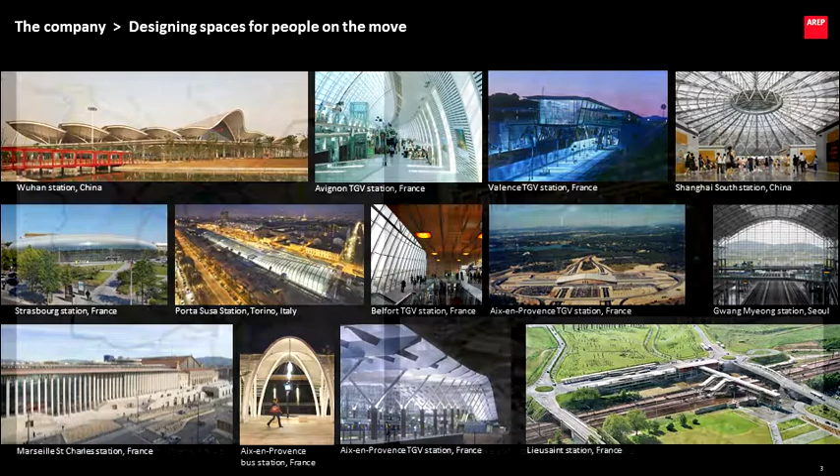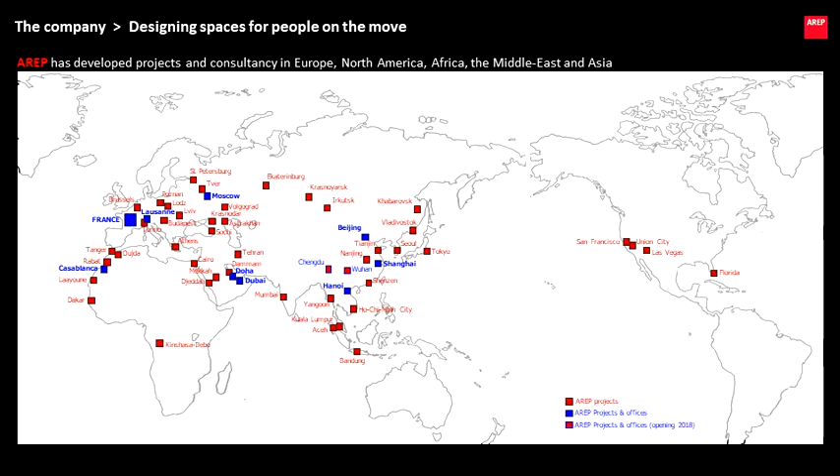We had the chance to start working when the kind of train renaissance was initiated through the TGV, which suddenly gave a new idea to transport, public transport, high-speed rail. And this high-speed record suddenly showed that train can be on another level. This was a kind of game changer for people, what train could be, at least in Europe. And it really changed the French and also the European geography.

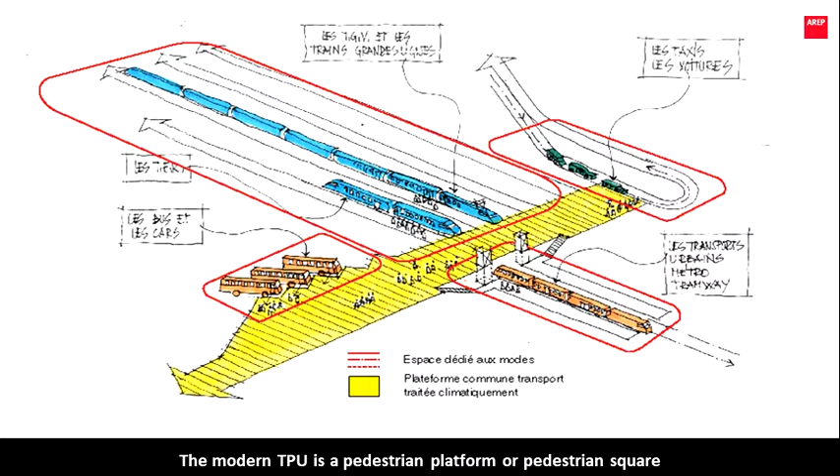For us, a station is the place where the traveler or transit user becomes pedestrian. That is what the yellow area in this plan means: once you put foot out of a bus or out of a train or out of whatever transit mode and you go to another mode, this is where the station is.

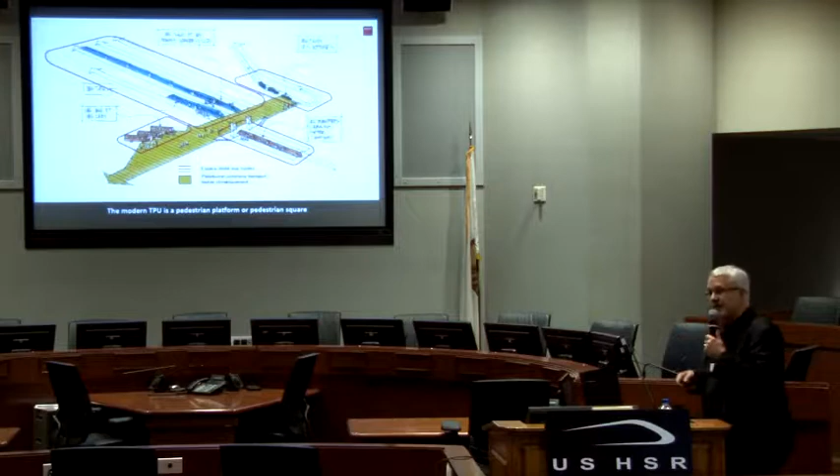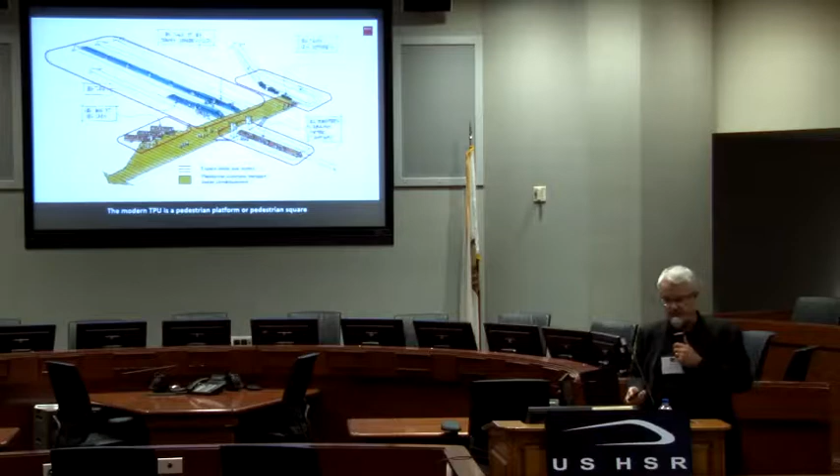Whoever owns that piece, and very often it's through various ownerships, it is covered, not covered, it's managed differently, but the passenger experience, the user experience is this yellow space. And if he's treated well inside this yellow space, he has a good transit experience. Then you still can cover that thing, you can build around, and you can make a city district, whatever you want. But the basic thing is really this idea: how am I treated when I'm a pedestrian?

So we like much more to talk about pedestrian-oriented development than about transit-oriented development, because it's the pedestrian we are talking about. And the fact that this yellow piece is not only on one person's or company's property, but very often on various properties, including city, other operators, private land, etc., makes it so important that the different stakeholders work together. You can never do a transit project by yourself. It's at least two involved, mostly 5, 6, 7 stakeholders, some only financing, some only operating, some only constructing.

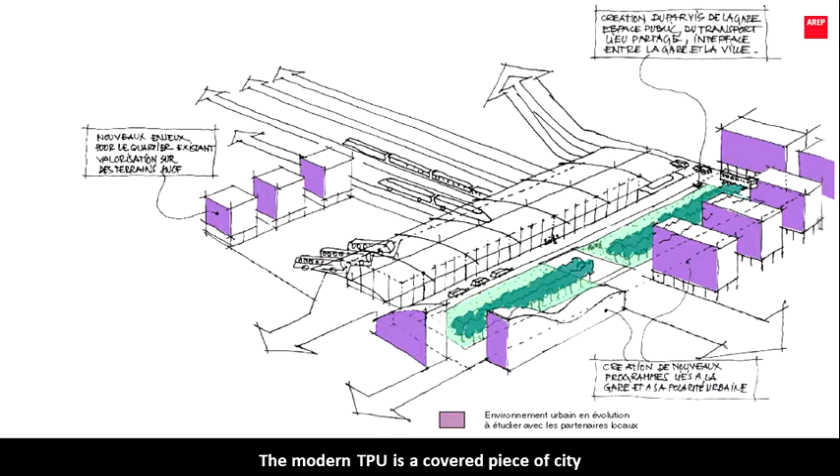So it's very important to have this in mind, that projects have to help to bring stakeholders together. If you don't have a project, you never bring stakeholders together, because you will still only be writing terms of reference, but you will not see what you will have. And people who are not used to thinking three-dimensionally, if you only give them text, this will not make them dream. So you need projects from the very beginning. And this works at all levels.

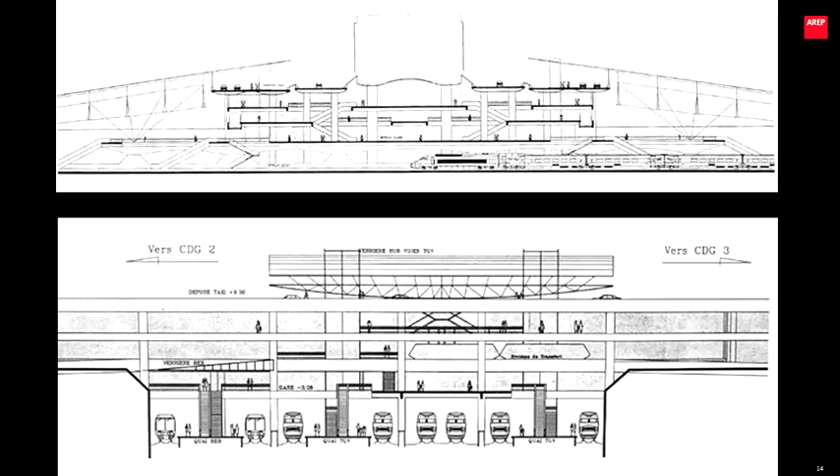This is the Charles de Gaulle Airport Station we did with Paul Andreu and Peter Rice. This is what we call an inhabited infrastructure. It's a mixture of ramps and trains and pedestrian bridges, and it's not really a building. It's various floors which are designed in a totally different way, and they are owned by 2 different owners. One is Paris Airport, the other is French Railways. But for the passenger, it's one volume.

He doesn't see the 1,000-page manual of how to operate that and who cleans what, etc. They just see the space that is very easy for them to use. And they have the experience that they see the planes from the station, they understand where they are, and they have a very good connectivity between all modes. And this goes right down to the platform and to every little detail.

Many years later in Torino, the high-speed rail station downtown, Torino Porta Susa, is still in this idea of big volumes where you find your way quite easily. It's a situation where the Italian railways had the tracks at grade level and brought them down one floor to get rid of this cut of the city that the train represented.

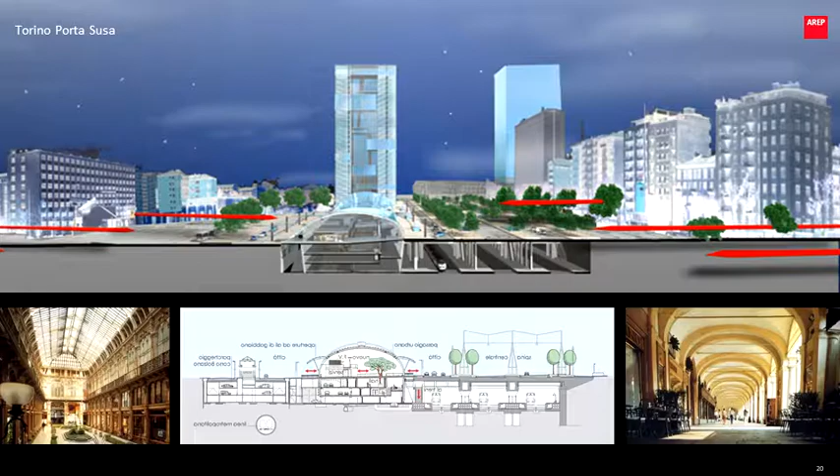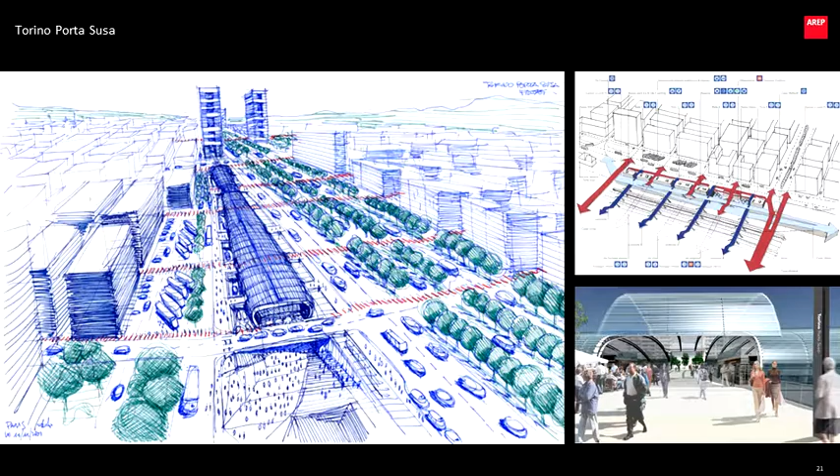So we constructed a long gallery, which is a kind of reference to the local galleries. And this allowed people to suddenly cross the station and cross the whole area, something they couldn't do before. And this became a kind of center of a development. The tower at the end was part of the project. It's still under discussion. Again, things take time. But the station has been open for a few years now and is working pretty well, and is still a kind of shining beacon at night for the area.

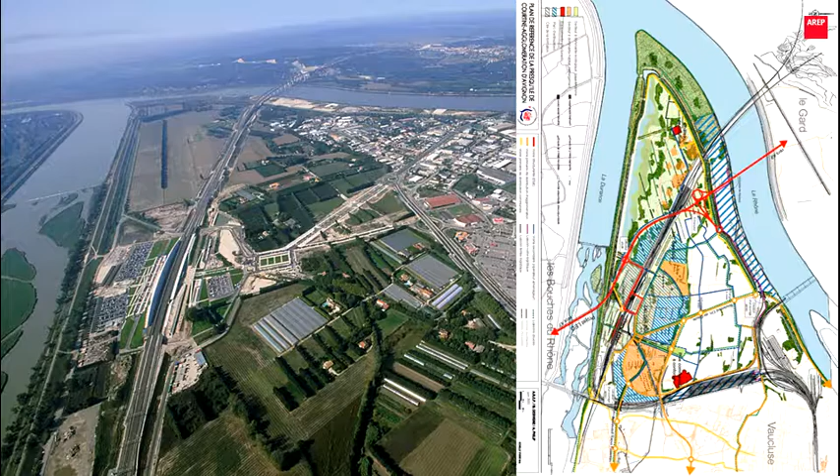So while we were doing the station, we did the master plan at the same time for the whole area, and the whole station access road, you see a kind of quite monumental road to the right. This was linked to a concept of how to access this future development that is supposed to come. So you see this road is much too big just as a station access.

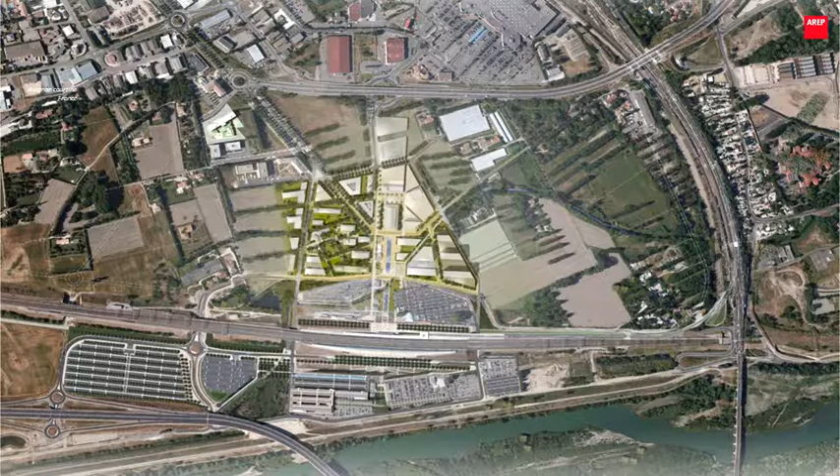And it took now close to 15 years to make the first developments happen. This is the real master plan of what is going to be built in the next years. And meanwhile, you see to the lower left, additional parking, which is now doubling the existing parking. And you see a new bridge and highway that was planned at that time to be done 10 years later, and now it's happening. So it's again a continuing process, and even if you've finished the station, it goes on and goes on and goes on.

Same thing happening in Aix-en-Provence. It's a station close to Marseille, and sitting close also to the Marseille airport. So again, it's the crossing with a local regional highway, I would say, that we diverted so it gets under the station and feeds, first of all, parking. There is a long-distance, long-time master plan for the development around, but for the people, it's more important to get to that place. This functions nearly like an airport, so there will come some development, but here the transportation part

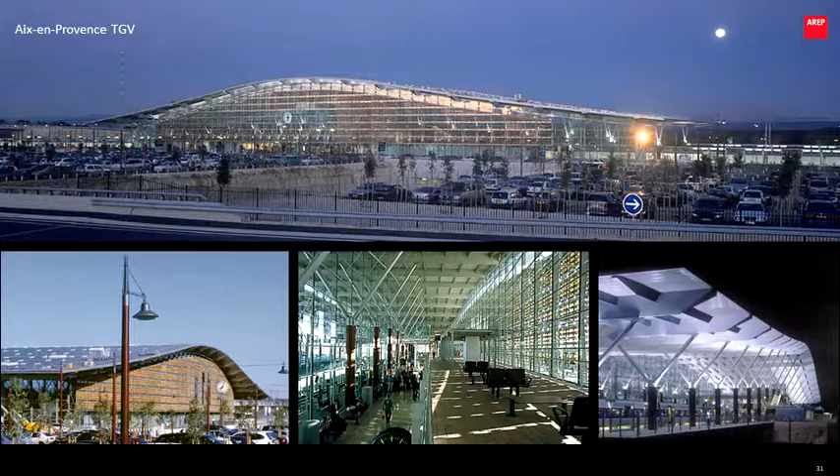is the most important. And again, it's climatically quite a complicated area, so you have to make sun shades on one side. And on the other side, people wanted to have a kind of local monument as it's sitting in the middle of a kind of undeveloped area. The local people wanted to have something that can be seen and gives the feeling that from here you can go quite far away.

In a similar situation, many years later, this is the Belfort station on the Lyon to Germany line. Again, you are in a situation that could be somewhere in the Central Valley, maybe. You see the size of these pieces. This is again mostly parking, buses, so all about intermodality. There is now some development going on. It's a crossing of a local rail line with the high-speed line, but the area around is pretty rich.

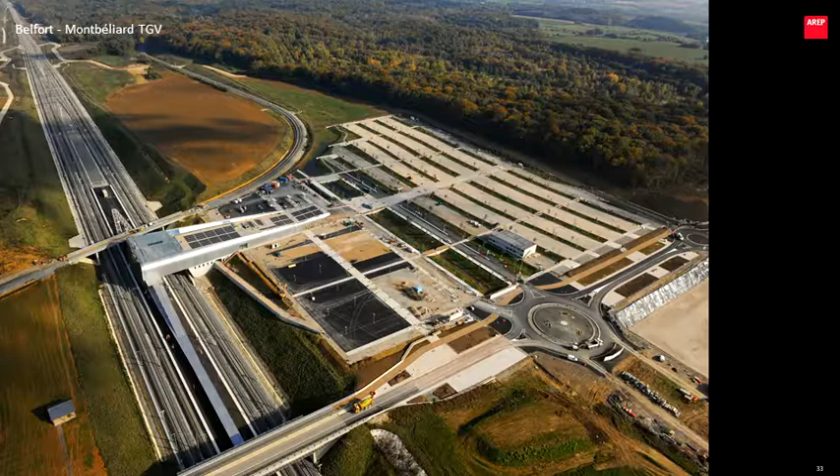They're doing a lot of car construction, so they wanted to have a station that expresses through its look a car body in a certain way. They wanted to show that this is a rich and important area. So we try to give them this kind of good feeling about their place, and also then make an inside that is pretty much cozy, and you still have the look to the countryside outside. So while you wait, you can have a short break and see the landscape before you go to your maybe more hectic travel.

One of the very last stations; we are getting, by the way, more and more to wood, the more the wood gets constructible and easy to deal with. This is a station in the northern France in the extension of the Bretagne high-speed line. So here we are in a small city. It's Lorient, which is now maybe 2 hours away from Paris. And commuting goes both ways. For a long time, we believed that everybody would commute to Paris. That's quite different. People start commuting from Paris to somewhere outside because they can live well in Paris, but find better work an hour away or 2 hours away in a smaller city. So it's an interesting phenomenon.

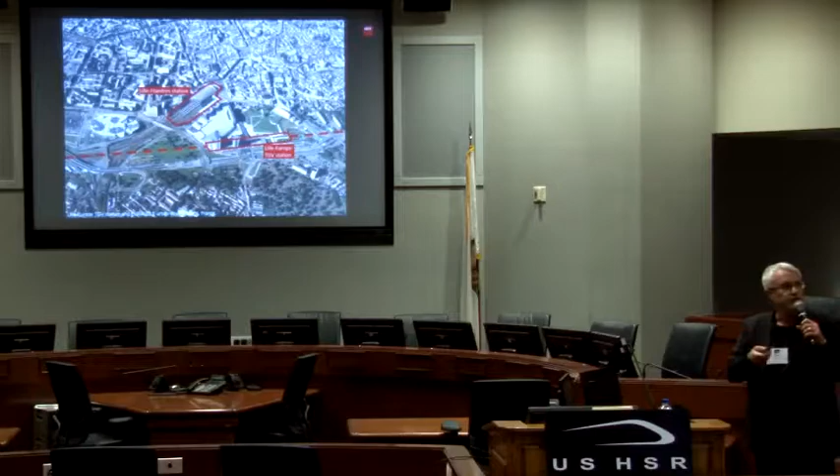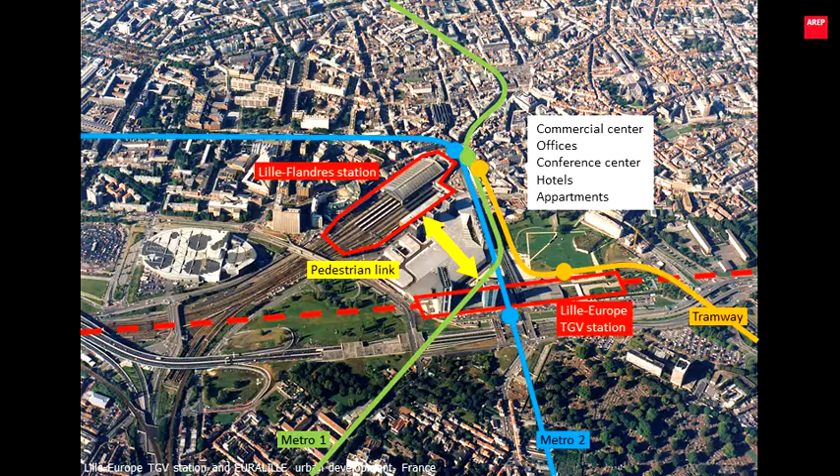And they had the chance that there were 2 metro lines, a tramway line, and this created a kind of transportation center that allowed for the development of a huge commercial center, student housing, hotels, offices. To the left you see the concert hall. And the interesting thing is that, again, the station is a linear station where all the services are under one roof together with the tracks.

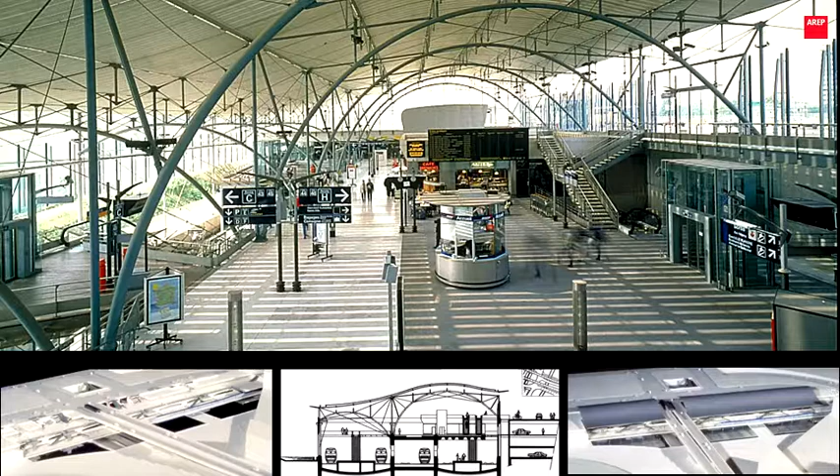This is the kind of design you get more and more. You get away from station buildings and then platforms. The whole thing becomes more and more an integrated volume. And this is a pretty infrastructure-ridden area, but still, when you're in there, it works very, very well. It's very urban, very walkable, and this station was opened in '93.

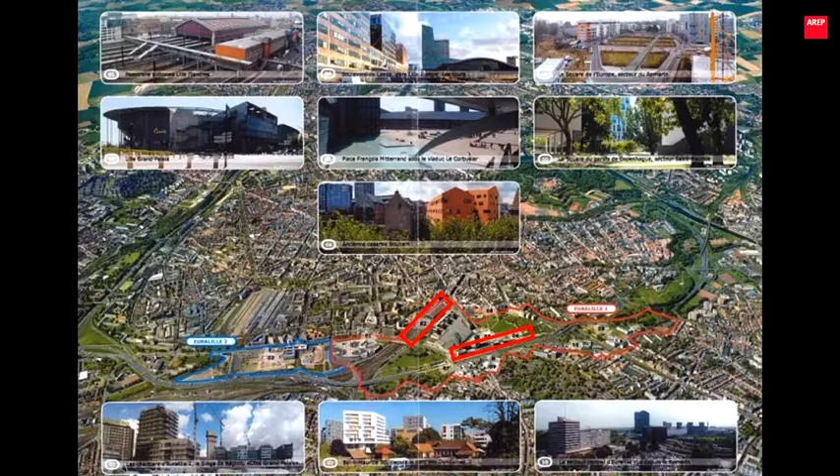For 25 years, they are still doing more development around it, and the two stations are where the red squares are. And from the left to the right of this whole photo, this is ongoing housing, offices, renovation. So it's really a TOD that was not just a one-shot. This triggered a whole renovation of the city.

When you look at some of the bigger Parisian stations, again, these stations have existed for 100 years, and they have been renovated. And on this image to the left, you see some modern glass volumes. These were things we have recently added because we didn't have enough space. One of the problems with existing stations and rising traffic is that they get too small at the end of the day. And as they are historic, you very often have difficulties making them bigger.

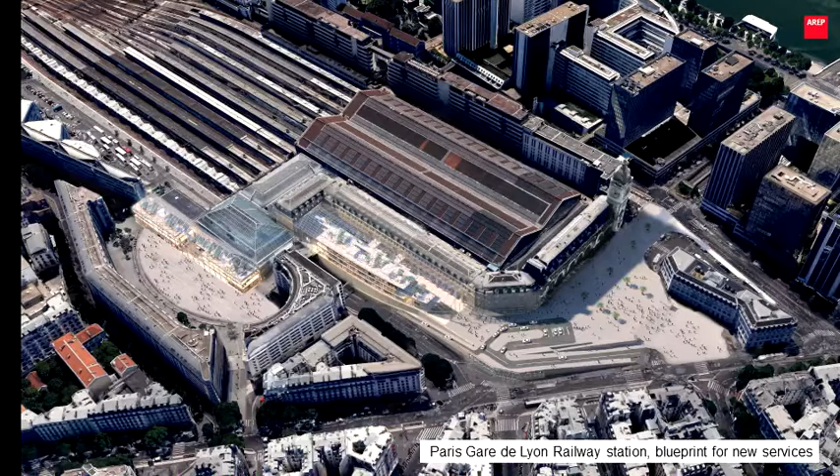So you add new sheds, you add new waiting spaces, but it's still not enough. And now we have to make a second layer of additions to these exterior spaces to make new shops, new passenger facilities, because these stations also become hubs for the community. That means not only travelers go there, you have all the people from the area doing their shopping inside, and sometimes people just go there to sit around, have a coffee.

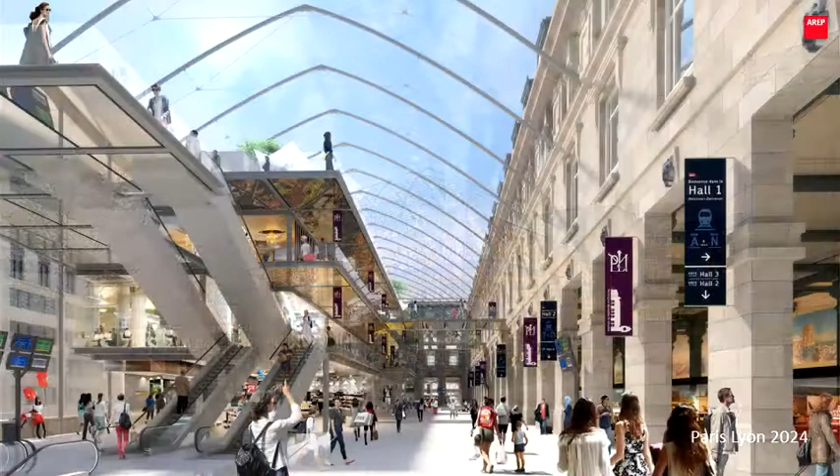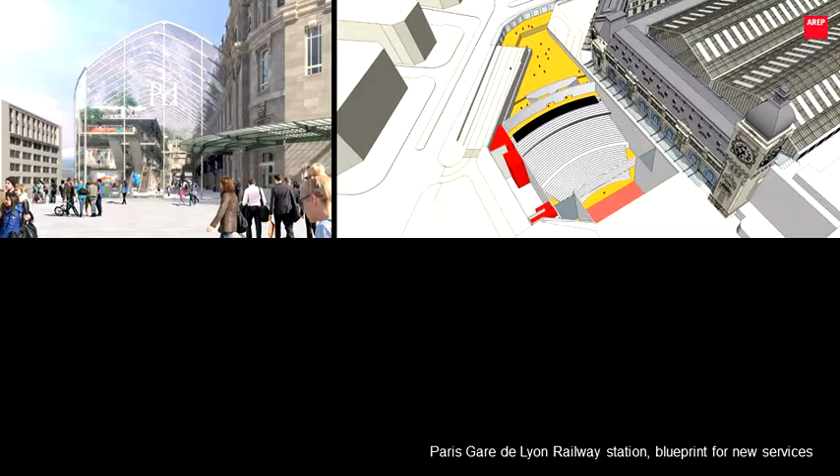So you see these kinds of extensions that you are putting against the historical building. And now the city even wants to make a concert hall under the station square. This is their newest idea because they feel this would be the right location because there are so many people, so it's perfect for a public venue.

Marseille is interesting because this shows how important it is that the city and the railways and the other stakeholders work together. This is the extension of a historic building that is a stub-end station, and on the aerial photo to the very left, it's a little far away from you, I'm sorry for that, you see a bus station and a road that is cutting the bus station from the trains. You have a building that was put over the tracks in the 60s and the station. To the very left, you have the university, lots of people walking through, and this was just an impossible environment. And you see the plan below.

And the fact that the city and the architects and the railways could work together allowed us to close that street. The city bought one of the blocks, tore it down, which allowed us to put the bus station directly on an extension of the historic station building. So you have a kind of new concourse, which you see to the lower right, which now brings together the buses, the regional rail, the long-distance trains, and the high-speed rail.

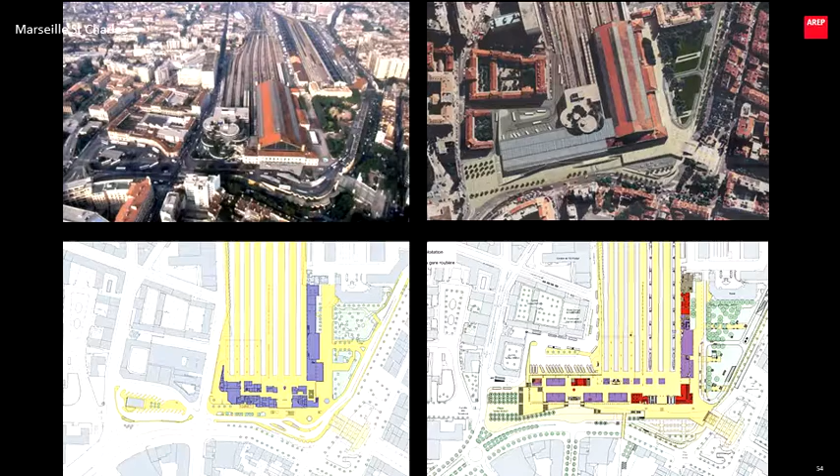So you have this extension, which in fact is the other side of the bus station, which now suddenly feeds into a common volume with the trains. And inside you have a commercial center and various services that link the historical and the new building. This took a long time to get done. There were, I think, 12 stakeholders that all financed it.

And the important thing is that nobody financed just this column or this underpass or this piece of roof. There was a kind of common budget based on the project done by us, the architects, which was costed at a certain level. And then the stakeholders discussed between each other what percentage of this cost they might take. And in the end they couldn't say, for my 12%, I got this wall. It was just a part of the overall project.

But then they established a project coordination team that managed all that. And so governance of these kinds of projects is a very, very important point, that you have people who run the thing.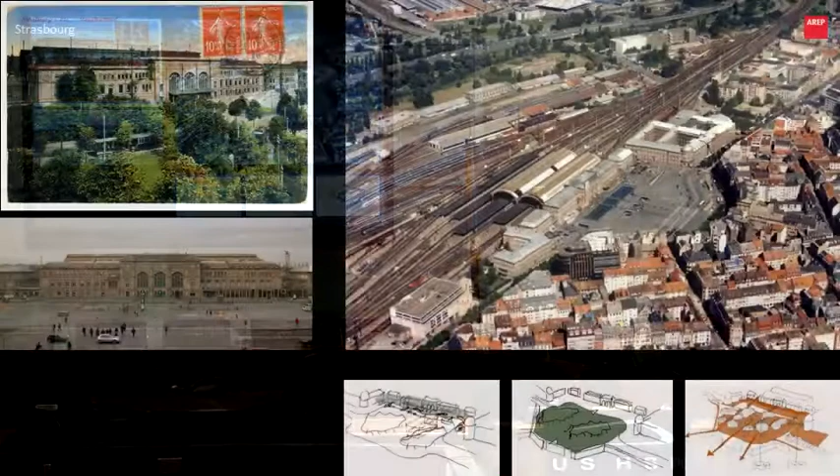Strasbourg, again, is a situation where over time the station, in fact, degraded. It was very good at some time. The upper left was when it was open, sitting in the park, very beautiful. 100 years later, it looked like the photo just below. The park was gone. The city, for whatever reason, had made a big pavement. This is the Christmas market once a year. The rest, it was empty.

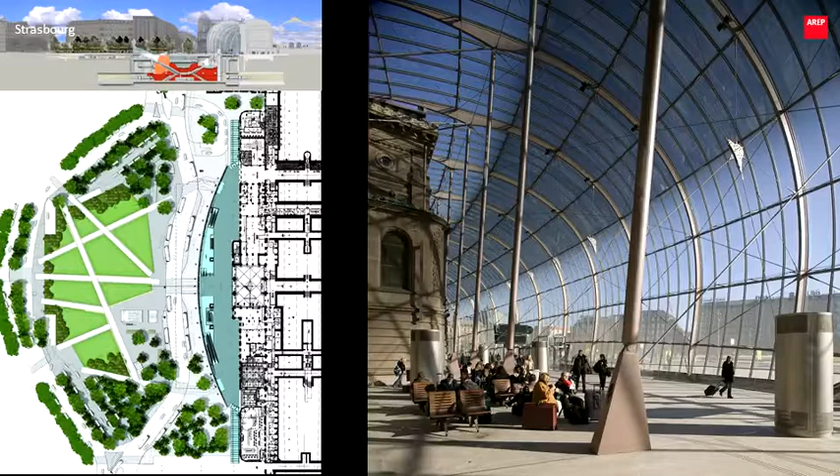And so there was a tramway under that, but as the station was very thin, they couldn't get the tramway in the station, so they put it on the square. Nothing really worked. And when we started extending it for the TGV East, because there was just not enough square there, the only possibility again was to extend it outside.

So we redid the square, we reorganized intermodality, and we constructed a huge glass volume in front of that, which in fact at daytime has its own shape, but at nighttime becomes totally transparent. And so you have this dialogue between the old and the new.

This could be Diridon, but it's this kind of thing which again you need to do with all the stakeholders, because the roof was paid by the city and is sitting on city ground, because the railway property ends right where the wall ends. So the traveler doesn't see that. He just goes through it and thinks it's one thing. But in fact, it's owned by various people and operated by SNCF, but on behalf of the city.

Le Mans is the same thing on a smaller scale. This is the historical situation before high-speed rail arrived. What you see on the lower part is a very disorganized station square, lots of buildings. To the upper side, more or less wasteland.

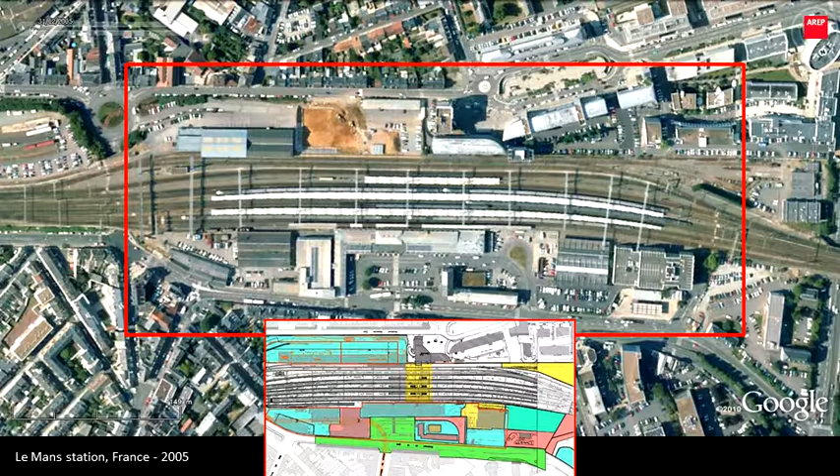And what is in addition complicated, which I think you will have all over the place, the map below is the different ownerships. So the red square on top shows where the map is, and the different color dots were different owners, either inside the railway or private or whatsoever. So how to make of that one project?

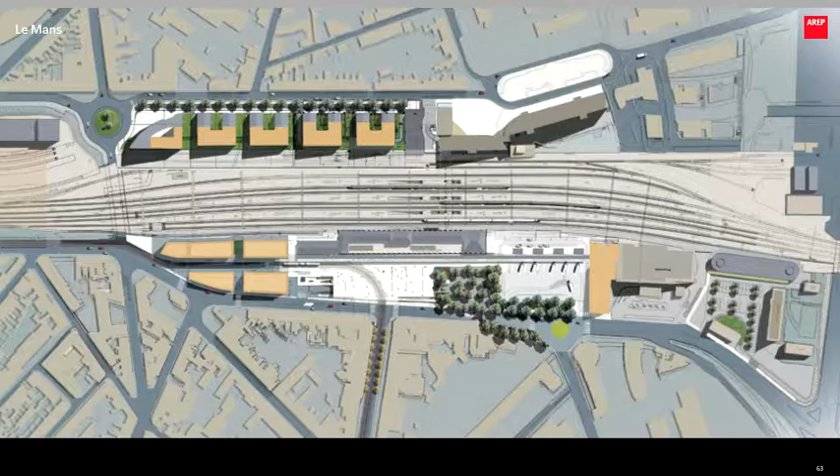So we managed to do a master plan because the city wanted to bring the tramway in, a light rail. So this light rail allowed, in fact, to reorganize the whole thing, tear all these buildings down, and to generate a quite different, more organized space, which in fact is organized around, again, a small canopy. This time it's a much smaller station, you're 1 hour away from Paris, which allowed to bring together all the modes into one, what we call a kind of transportation gallery.

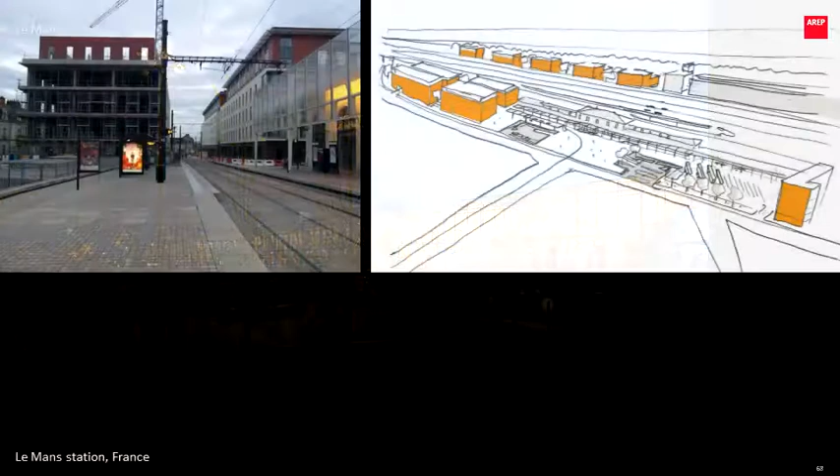It's like a spine where you plug in the buses, the taxis, cars, and the tramway, and this gives a pretty nice, pretty dense, pretty easy walkable place for changing from one to the other. And this gallery ends up like a public walkway into a TOD development, which is happening to the left in the sketch.

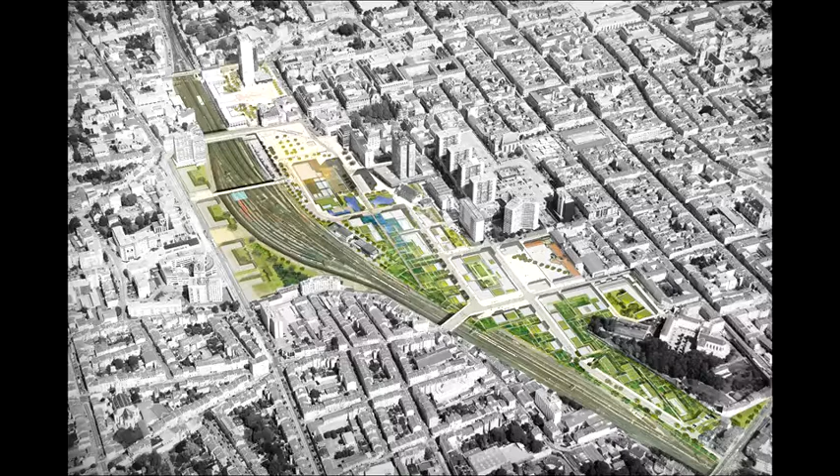And so it takes you quite a while to get this reorganized, because again, ownership is totally split among I don't know how many people. It has to be phased, who pays what at what time. So you need again a master plan that you have to develop with the city to be able over the years, I think we're 15 years on that, to get it organized, get the utilities redone, the roads redone, and to make it a TOD, which doesn't look like Fruitvale or something similar. But this is the TOD that you can do in an existing situation. It's not a greenfield development.

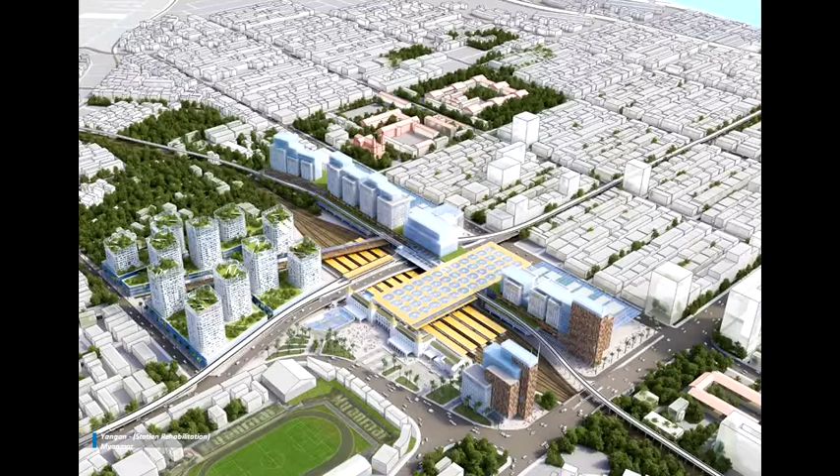In countries that you wouldn't believe in, this is Myanmar of all places. This is Yangon. These kind of countries are working now on these kind of developments. This is Yangon main station. You see a kind of British historical building at the left end of this huge track-spanning structure. And at the same time, this is a master plan we did for them, you have offices, housing on a totally different scale from what we are doing. And this is not even China.

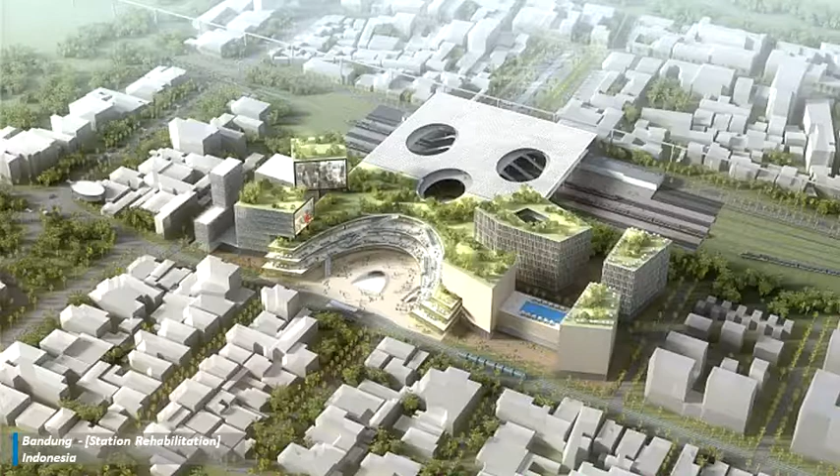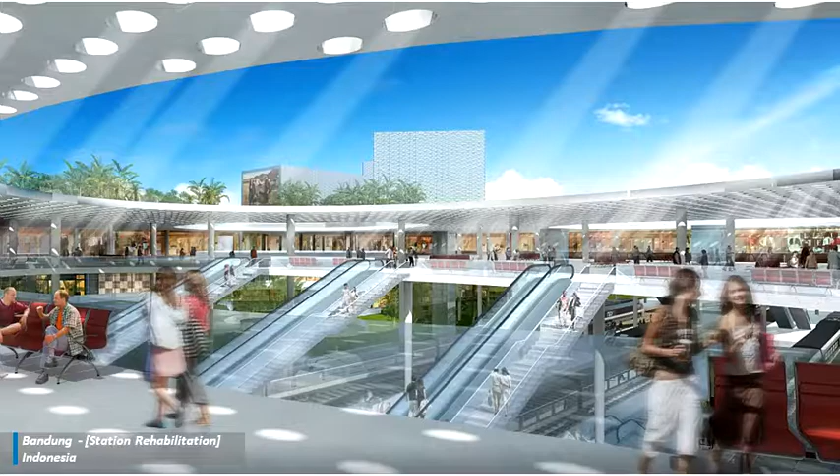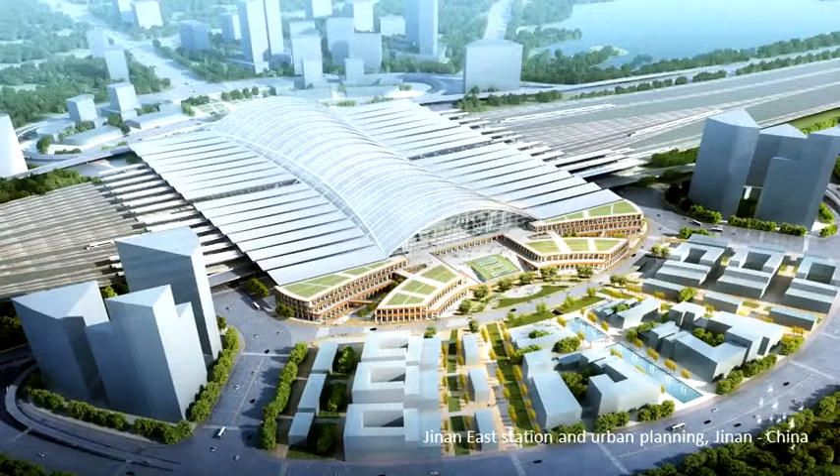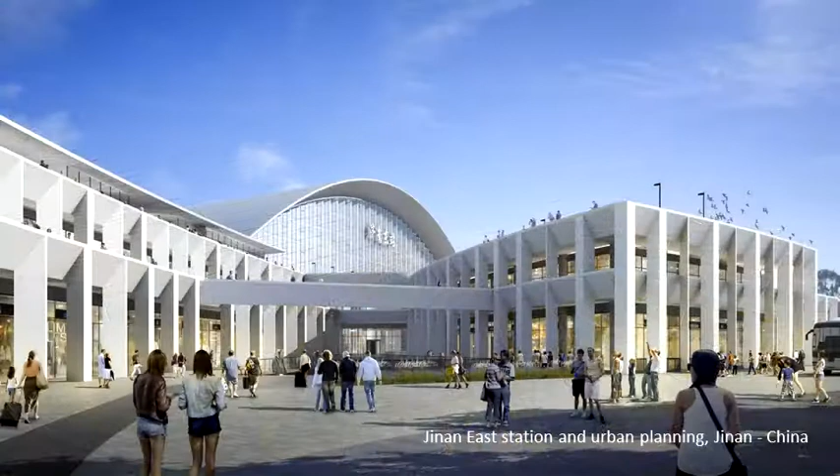This is Jinan East that we just won. You have a huge circular ring that you guess on the other side of this enormous bridge structure. But the transit-oriented development, so to speak, radiates directly into the station. So the whole thing is a composition where the station and the urban development becomes one piece, and then has this kind of urban atmosphere where the station isn't anymore. It is monumental by itself, but it just feeds in the surrounding district.

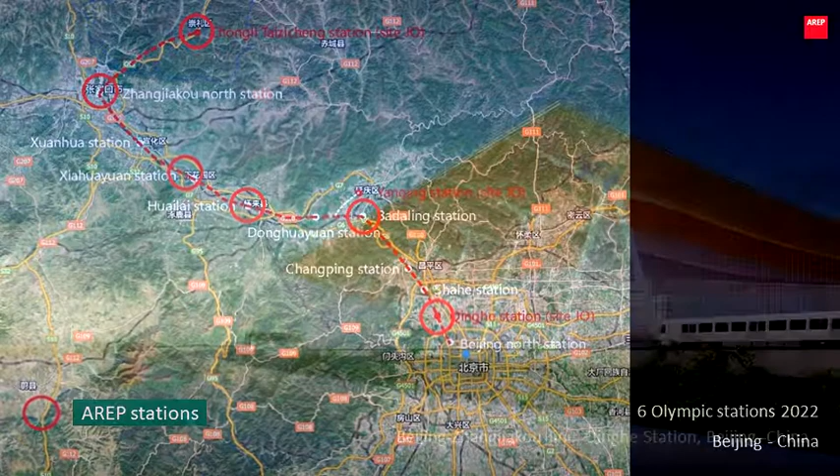And to finish, this is brand new, so you're one of the few people who have seen that yet. We just won 6 stations that are on the high-speed line from Beijing to the Winter Olympics 2022. And just to give you a few images of what the Chinese are up to now with our help. So this is a station in Beijing where this thing starts. And this is just to go to the Olympics. So you see the kind of scale again that they are able to do.

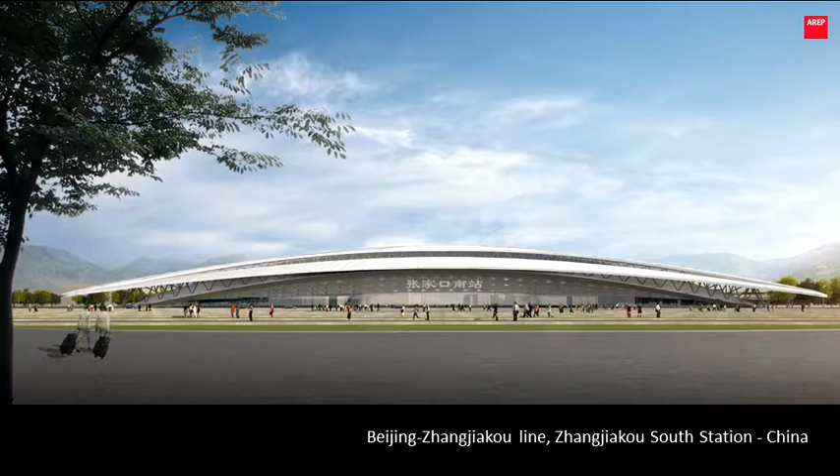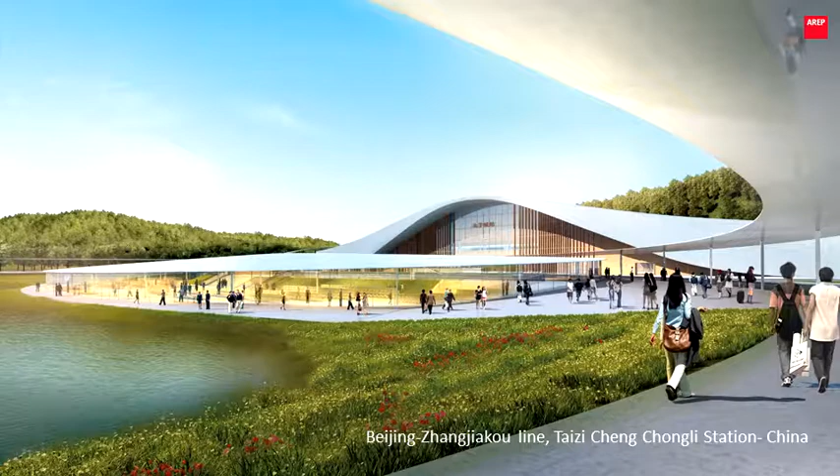And these are a few stations on the line, which are more referenced to nature, more integrated in the environment. There is winter and summer activity. And when you come to the end, the station is underground, given the local situation, so it totally blends in, and you don't really see it anymore. You just go down and have again this ring, the circular motif, which is so important for the Chinese.